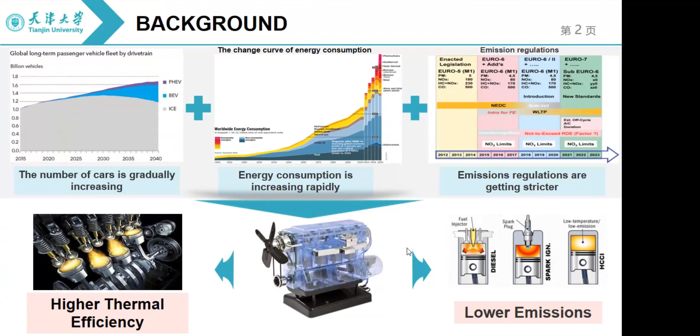In recent years, with rapid development, the energy crisis and environmental pollution have become hot topics in society. The increasing number of vehicles has increased energy consumption and environmental pollution to a certain extent. At the same time, the constant update of vehicle emission regulations has greatly restricted vehicle emissions. So this puts forward higher requirements for the development of engine technology, and the engine needs to have higher thermal efficiency and low emissions.

So it is necessary to calibrate the engine to improve its performance. The traditional calibration method usually adopts manual calibration, which largely depends on the experience of engineers and a large number of experimental points. This makes the real calibration process cycle long and costly. The emergence of virtual calibration, which is based on a virtual platform to build the engine model, can reduce the period and cost of the calibration process.

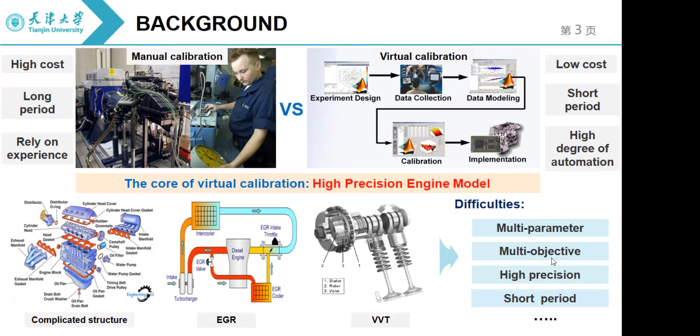In virtual calibration technology, the core is to build a high-precision engine model. But with the application of EGR, VVT, and other technologies in the engine, the engine system structure becomes more complex, and multi-parameter, multi-objective, high precision, and shorter period become the main difficulties in the engine model calibration process.

Next, I will take a gasoline engine as an example to explain how to quickly build a high-precision engine model. Firstly, in the DOE part, we obtained data of 2660 experimental points of the engine through experiments. According to the speed and torque, 500 of the 2660 experimental points were selected to identify the parameters of the model based on the uniform selection method of space filling.

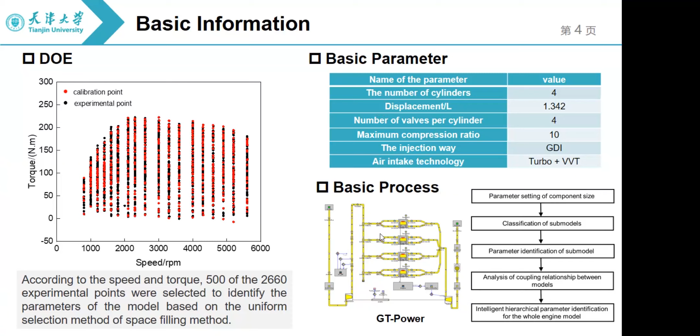This table is the basic parameters of the engine, and we build the engine model based on GT-Power, and this picture is the basic process. According to the characteristics of the parameter identification method of each submodel, the submodels can be divided into categories, including identification by fitting, regression prediction, and coupling optimization.

For the models of identification by fitting, all input and output parameters of the model can be obtained directly from the experimental data, and the numeric values of each coefficient in the model can be determined by the polynomial fitting method only by substituting the experimental data into the model.

We take the friction model as an example to study this kind of model. This is the simplified friction model used in GT. In this model, the FMEP, Pmax and CPM can be obtained from the experimental data. We only need to put the data of 500 experimental points into the model to determine the values of the FMEP constants A, B, and C through the fitting method.

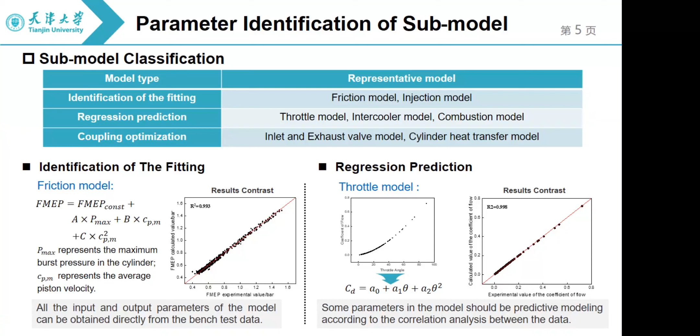For the models of the coupling optimization, some input parameters of the model cannot be obtained directly during the calculation, and the parameters cannot be calculated according to the existing experimental data. The prediction model of these variables is established based on the historical experience analysis, and an intelligent algorithm is used to iteratively optimize the coefficient in the prediction model.

We take the intake valve model as an example to study this kind of model. In the intake valve model, it is necessary to determine the flow coefficient on the different lift, but the flow coefficient cannot be calculated from the experimental data. Based on the analysis of the inlet and exhaust flow coefficient of the two existing engines, a prediction model of flow coefficient is established, and we take the air intake, which is directly affected by the flow coefficient, as the optimization target, and optimize the coefficient in the model by PSOSCALF.

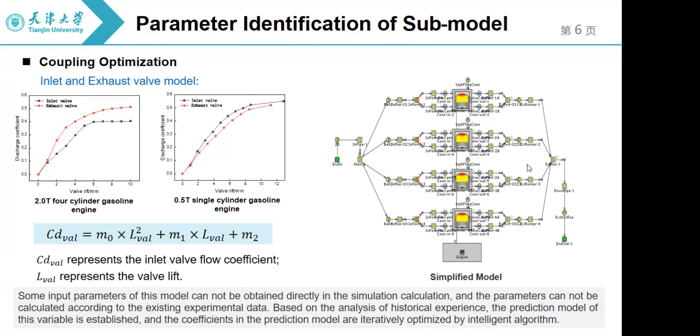At the same time, as shown in the figure, we simplify the engine model to shorten the time required for model optimization. And this is the simulation platform. The PSOSCALF is completed in MATLAB, and we use Simulink as a carrier of intermediate parameter transfer between MATLAB and GT.

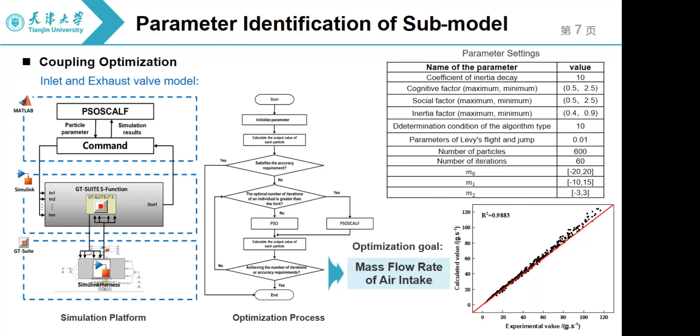And this is the optimization process. This table is the setting of the specific parameters and particle range in the PSOSCALF. And this picture is the comparison results of the air intake. We can see that the calculated result of the air intake is basically consistent with the experimental values.

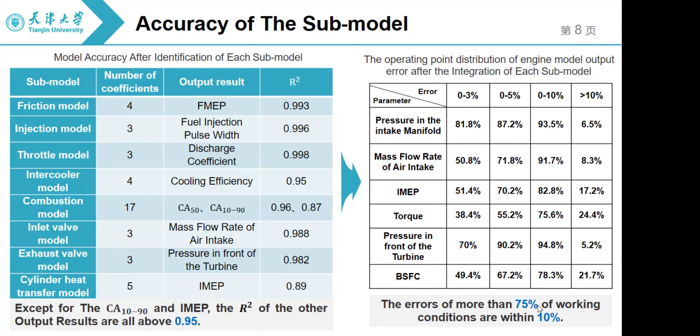The table is model accuracy after identification of each submodel. From it can be seen that except for the CA 10 to 90 and IMEP, the R squared of the other output results are all above 0.95. And this table is the operating point distribution of engine model output error after the integration of each submodel. And we can see that the error of more than 75% of working conditions are within 10%.

So, in order to further improve the accuracy of the engine model, it is necessary to adjust several parameters of the engine. According to the process of parameter transfer among the submodels and the coupling relationship between the model parameters and the output results, an intelligent hierarchical parameter tuning method was established. The model output is compensated by modifying key parameters. In the process of calculation of each working condition, Bayesian optimization algorithm is adopted to adjust the key parameters to modify the output results.

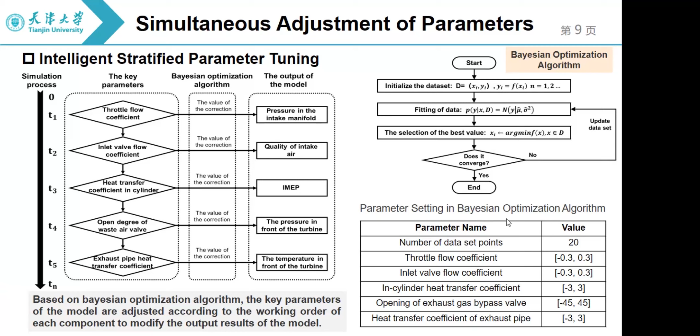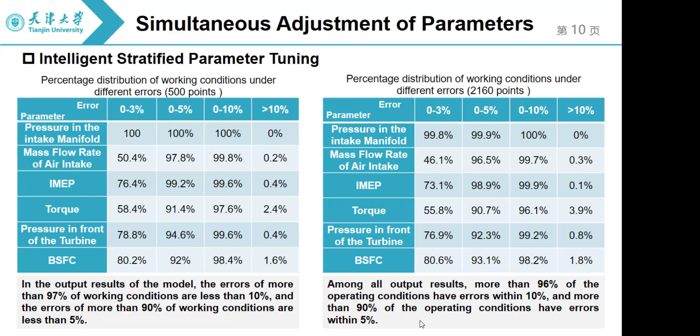In order to further verify the generalization ability of the engine model after parameter optimization, the accuracy of the model was verified again by using the remaining 2160 experimental points. And this table is the percentage distribution of the working condition on the different errors. We can see that among all output results, more than 96% of the operating conditions have errors within 10%, and more than 90% of the operating conditions have errors within 5%. And this is the conclusion.